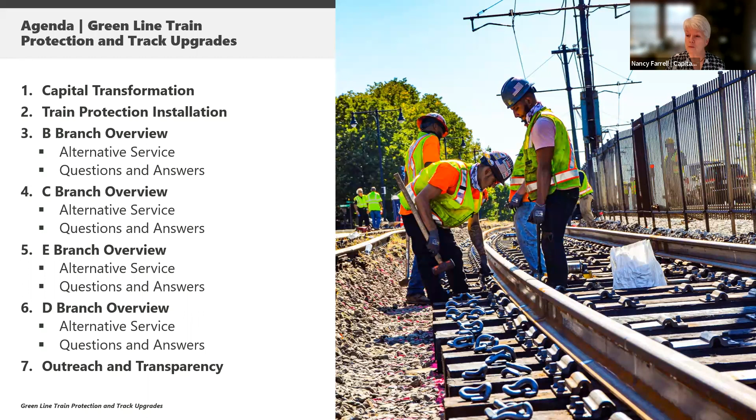Thank you, Nancy. Well, on behalf of the MBTA, thank you for joining us today. I'm here with Desiree Patrice, Andres Ashuri, Gwen Dunleavy, Ben Weinstein, and Curly Champion from the Green Line Transformation staff, but also have other project design team members with us as well.

Also joining us is Tom Yarley from Masco, and I have other MBTA departments here to support us in this presentation, including Heather Hume and Eric Burkman.

So the Capital Transformation mission is to improve the quality of service for MBTA riders and communities that we serve, through a strategic capital investments approach. But before we get started, allow me to take a couple minutes to highlight how we prioritize this portfolio of investments that's supposed to help improve the quality of service.

Building off the success of the Green Line Transformation, the MBTA formed a Capital Transformation Unit this past November, to bring a similar approach with discipline, planning, and execution, not only for the Green Line, but also to the Orange and Red Lines. We take this holistic approach to every project we undertake to improve the quality of service.

To do this, we have categorized each investment based upon its primary purpose, including improving safety, state of good repair, enhancing accessibility, upgrading trains, increasing capacity, improving the rider experience, and expanding service. Across the Capital Transformation team, we are committed to transparent and honest communication with all riders as we drive this progress across the three lines.

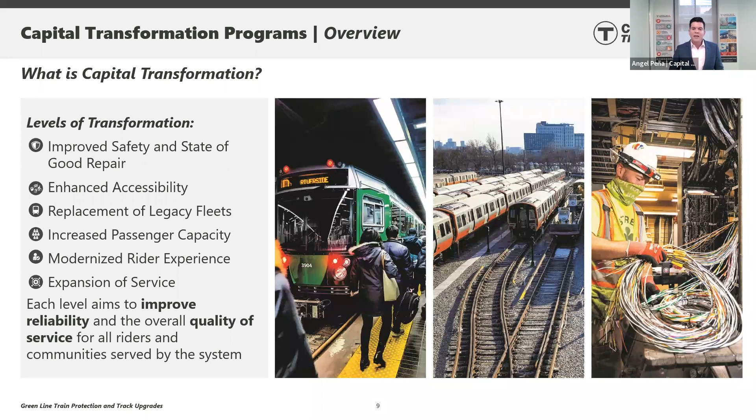But today we're here to speak about the Green Line Transformation Program. I would like to take a moment to tell you some of the exciting things we have been able to do over the last 3 years or so.

Throughout the pandemic, we accelerated work while enforcing strict guidelines to promote the health and well-being of our staff, construction crews, and the community. We also coordinated with stakeholders across the Commonwealth and communities to implement several full access closures, with one main thing in mind: to minimize disruptions and deliver these improvements much sooner.

Over the last years, we have successfully utilized this accelerated approach for many of our investments on the Green Line. To recap: throughout 9 full access closures, which we also call surges, we were able to replace more than 11 miles of track and 30 units of special track work. What that means to you is a smoother and safer ride.

We also upgraded 10 crosswalks and 36 intersections along the surface branches. This brings so much benefit to the communities and people of the Commonwealth, because these features are unique to the Green Line, which crosses roadways and interacts with motorists, pedestrians, and cyclists.

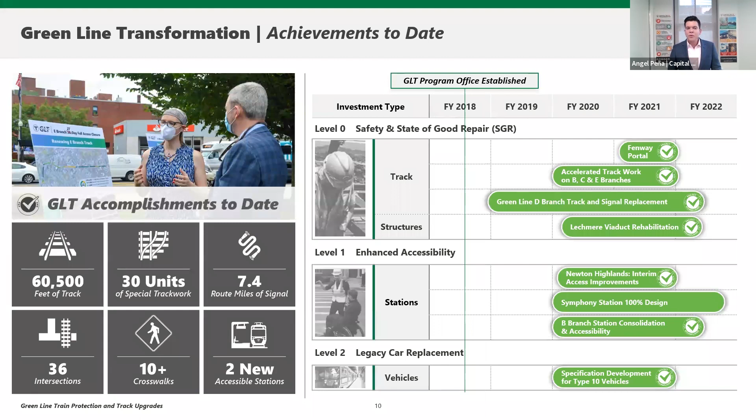I want to take a moment to bring up ongoing initiatives that other departments are bringing to the Green Line, such as the transit signal priority for the surface branches. Eric, do you mind giving us an update on these efforts?

Sure, thanks, and thanks for having me. This is really exciting and important work, of course. One of the things we started a few years ago was updating our...

One of the things we started a few years ago was updating our traffic signals throughout the region to respond to the presence of a transit vehicle. That includes the Green Line when it's on the surface going through mixed traffic intersections. This is relatively new technology, and it can increase speed along the line, decrease travel time, decrease dwell time, and improve safety at intersections.

One typical approach is as the vehicle approaches, it communicates its location to our operations center, and the traffic signal automatically adjusts by extending the green light so the train can make it through. We're excited about additional advancements expected over the coming year or so, including better measurement of how the system is working and expanding to include not only the Green Line but also bus.

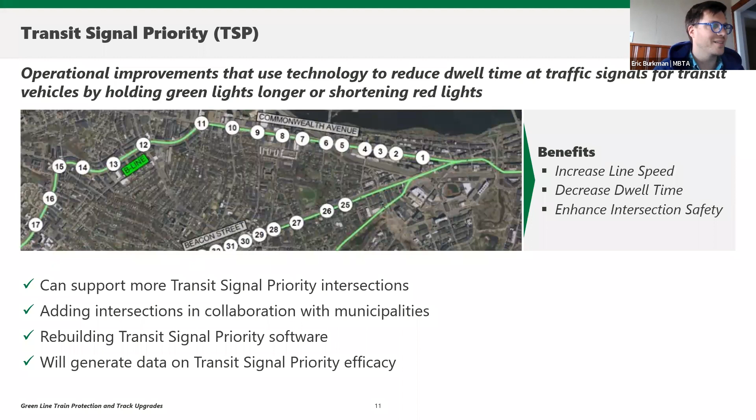Thank you, Eric. So moving on, the periods of accelerated work can be painful and disruptive for you, but they also allow us to return a safer, more reliable system back to service faster. By using full access closures, we're able to have construction crews work more efficiently.

Let me give you an example. By having a 12-day surge, we can complete the same amount of work as 6 months of weekend closures or night work. So we always seek opportunities to amplify the work during any closure, to maximize what we're doing. This enables us to have multiple projects gain access at the same time, so we disrupt you less later on.

Using this approach, the team will install the Green Line Train Protection equipment, which I'll give you more updates on later. That's the intent of the full access closures this summer on the Green Line. We'll also be upgrading 2.5 miles of track, 10 crossings, and 6 units of special track work used for switching and crossovers.

Like in any construction project, we know unexpected things can happen. But we'll always do what is best for you, the riders, and your safety. My team and I are committed to keeping you informed and providing updates on this progress throughout the construction season.

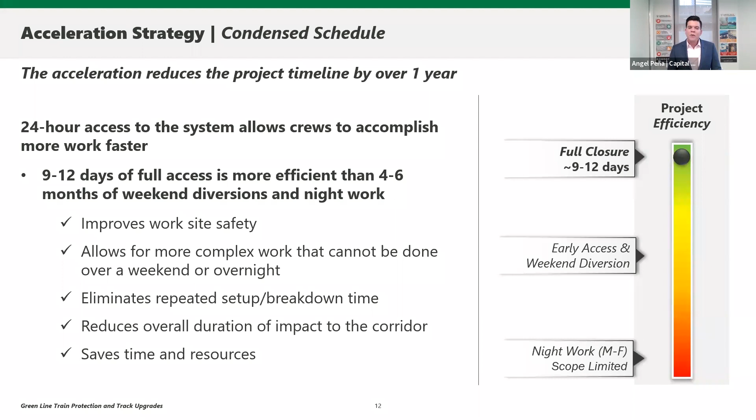Let's talk more about what the GLTPS, or Green Line Train Protection System, is about and how it works. The GLTPS will bring increased safety and reliability for the entire Green Line by improving safety through a system of vehicle and ground-based equipment to prevent train-on-train collisions. It also adds red light signal protection and incorporates speed enforcement. This is something we're fully committed to bringing to the system.

This project has four overlapping phases. Phase 1 is equipment design and validation, integrating new components into the legacy system. Phase 2 is vehicle installation, installing the new equipment into Green Line vehicles. Phase 3 is wayside installation, where we install upgraded signal equipment on the right-of-way. Phase 4 is operational integration, where the MBTA prepares to use the new safety system.

These phases overlap to accelerate their progress and mitigate service disruption for all riders. We will utilize the full access closures this summer to accelerate the installation of the ground-based equipment in order to enable us to implement the system by December 2023.

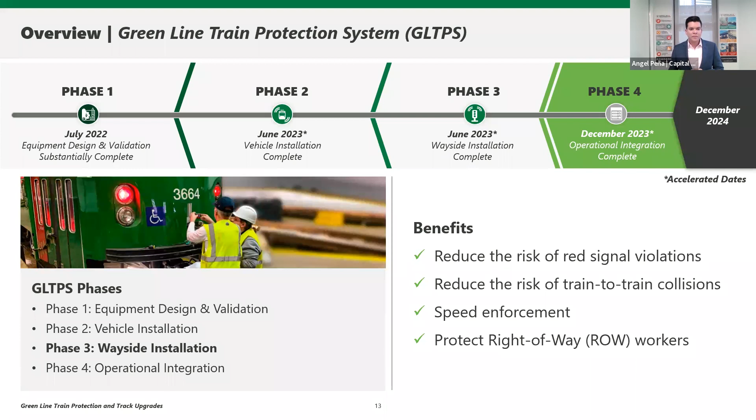So let's take a quick look at this brief video, providing an overview of how the system operates.

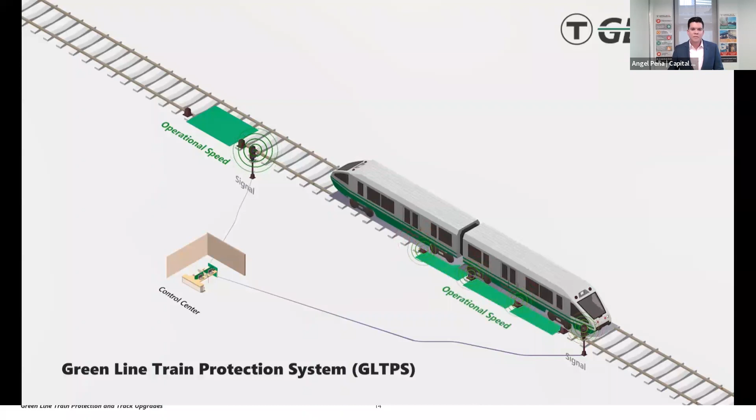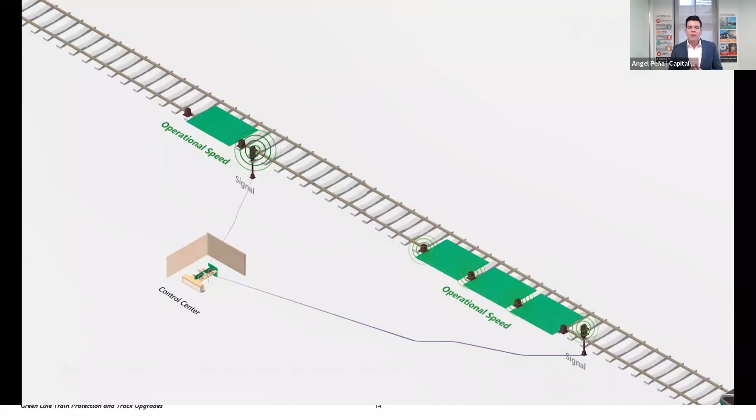So with that, I think that gives you an idea of how this works, but I'm going to allow Desiree now to review the plan of the construction work for this year.

There will be a total of 6 full access closures across the Greenline for the GLTPS wayside equipment installation. GLTPS uses different types of balises, or transmitters, installed for communication between the vehicle and the wayside equipment. There are 2 types of balises: the speed balises indicate a change in the allowable speed, while the signal balises guarantee a train stops with sufficient distance before reaching a dangerous point.

Junction boxes collect the data from wayside equipment and transmit it to the equipment installed on the train. The upgraded signal heads will specify the allowable speed a train should travel at.

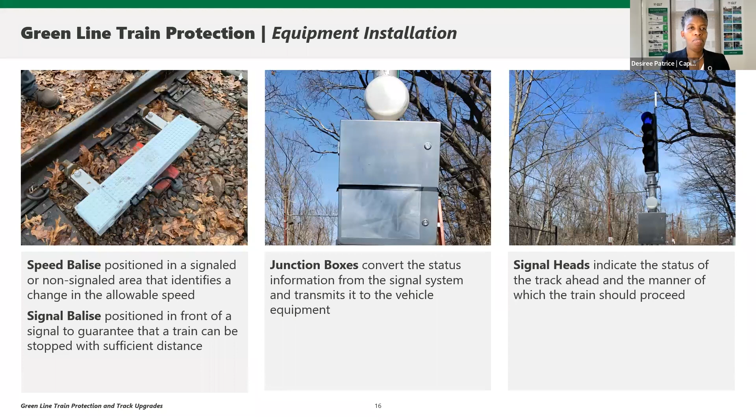Along the B, C, and E branches, the speed balises affixed to the track, wayside junction boxes, and signal balises will be installed. In the D branch, and the E branch along with the upgrades to the signal.

As Angel mentioned earlier, we will use these 6 full access closures to upgrade another 12,000 feet of track, 10 crossings, and 6 units of special track work. By replacing the track and crossing while simultaneously installing GLTPS equipment, we are optimizing the opportunity to complete 2 critical safety and reliability improvements during each full access closure this year.

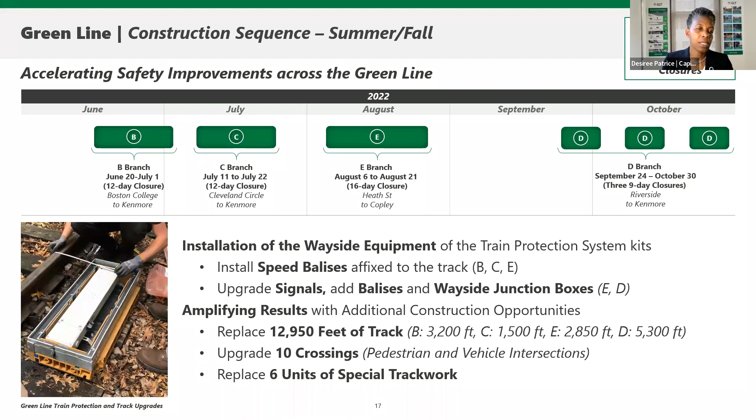Throughout the construction, there will be increased noise levels, different traffic patterns, reduced parking spaces, and impacts to pedestrians and bikers. These are some of the inconveniences that construction brings, but they are necessary to enable the improvements.

For concerns related to levels of noise, there's a 24-hour noise hotline that has already been set up for members of the community to use. The number for this hotline is shown on this slide and will be available online on the GLTPS project site.

As safety is our top priority here at Capital Transformation, crosswalks within work zones will be closed. However, signage will direct pedestrians to alternate accessible pedestrian crossings.

Capital Transformation staff will also monitor work sites, bus services, and traffic so we can proactively address challenges as they arise.

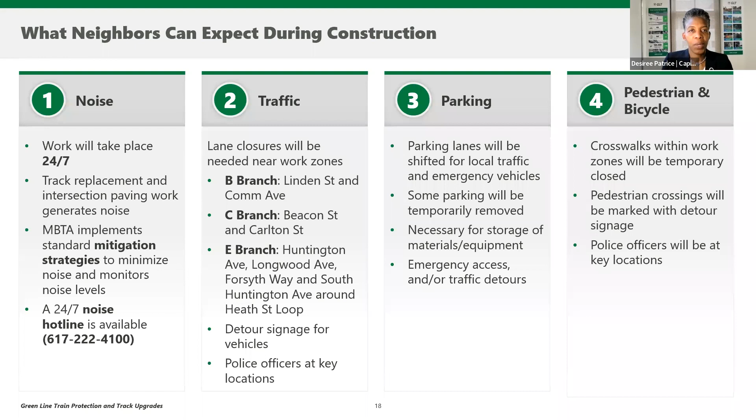As construction progresses, there will be many different crews executing the work. Construction activities will look familiar and others will look different. There will be times when activities on the track will seem calm because the installation of GLTPS equipment will utilize smaller and mobile crews. Overall, the work is a little bit quieter. However, you should still expect some noise associated with pavement cutting and patching.

During track construction activities, you will see similar activities from the past 2 years: larger construction crews and equipment doing track upgrades. This work is far more visible and disruptive.

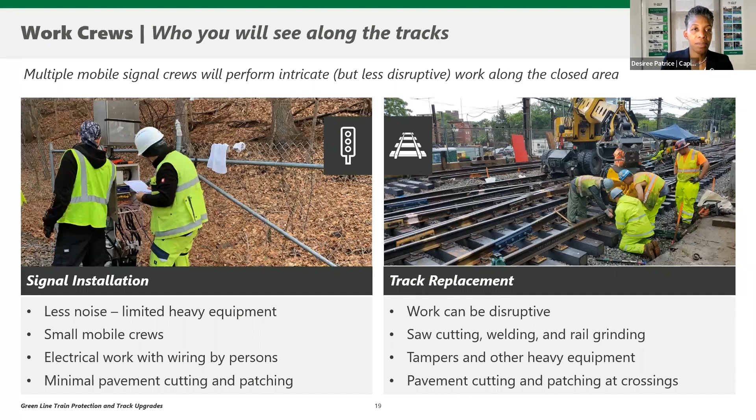So, Andres, can you tell us a little bit more in depth about when this work will start? Sure. The B branch will be our first Green Line surge of the year.

We will be closing the B branch beginning Monday, June 20th until Friday, July 1st. During this 12-day surge, regular service will be paused from Boston College to Kenmore to allow for track and safety upgrades. Accessible shuttle buses will run from the start to end of service each day to accommodate the B branch passengers.

As part of the GLTPS equipment installation, speed balises, or transmitters that indicate a change in the allowable speed, like Desiree mentioned before, will be attached to the track.

In addition, over 3,000 feet of track will be replaced between Linden Street intersection and Packard's Corner platform. We will also replace units of special track and upgrade one intersection at Linden Street and one pedestrian crossing at Fordham Road.

Taking a look at the general timeline for this work, prep work will begin on Monday, June 6th and wrap up on Friday, June 10th, with crews doing pre-welding and staging material. I want to mention that this prep work will not cause any impact on regular service.

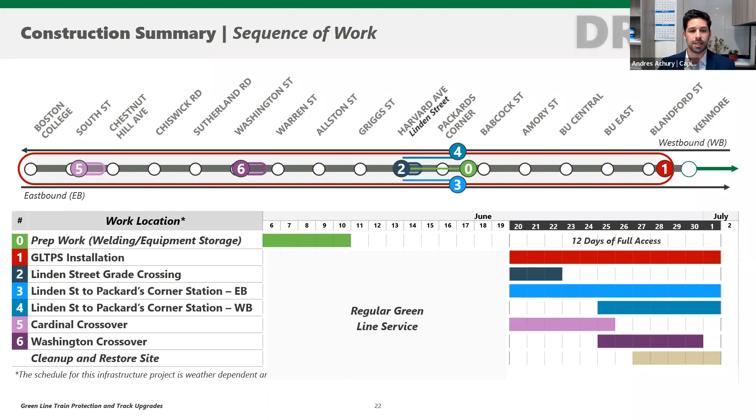Now we want to walk you through some specifics of the impacts on different areas. The track replacement from Packards Corner to Linden Street requires westbound lane closure from Brighton Ave to Harvard Ave, but will not impact the eastbound lanes. We are also taking some parking on the westbound side of the Collector Road. While doing this work, the Linden Street crossing will remain closed.

Pedestrian access will be supported with proper signage to direct people safely across Commonwealth Ave. The only pedestrian crosswalk that will be closed in this area is the Fordham Road crosswalk. The Packard Station crosswalk will remain open, but may require short-term closures at certain times. We will update the public when and if the crosswalk needs to be closed.

The main section of Commonwealth Ave will remain open for traffic in both directions. We will work with local MBTA and local departments to be present at active construction zones for the safety of all pedestrians and construction crews.

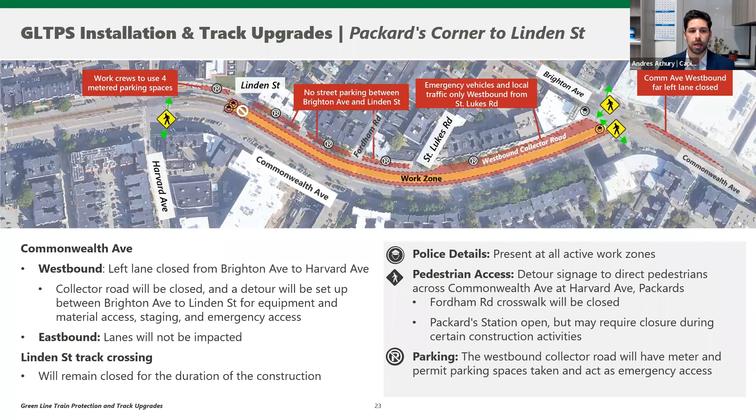For the 5 days needed to replace the crossover near Boston College, we will keep one lane open for travel in each direction.

Similar to the construction from Packards Corner to Harvard Ave, the westbound left lane will be closed between Lake Street and Greycliff Road for construction installing the special track work at the Cardinal Street crossover. On the eastbound side, we'll take both travel lanes and divert eastbound traffic through the parking lane for about 600 feet between Lake Street and Greycliff Road to make sure there is enough room for cars to get across the section.

With this construction, we do not have any planned impacts to pedestrian access or vehicle crossings. However, there will be no resident parking between Lake Street and Greycliff Road on Commonwealth Ave heading eastbound. In addition to the traffic management devices, MBTA Transit Police and Boston College Police details will be present at active work zones.

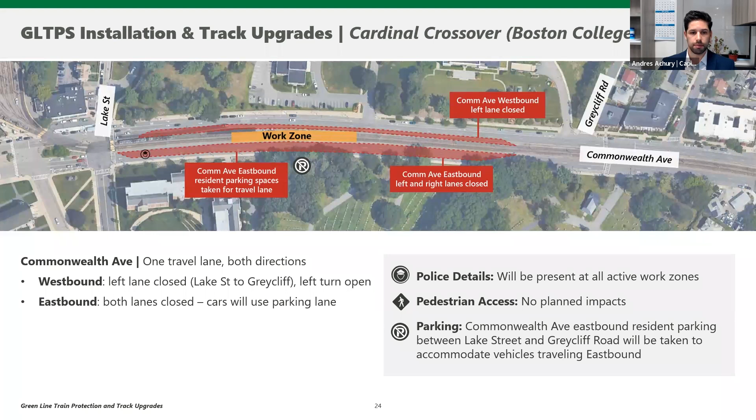Similarly, for the Washington Street crossover upgrade, we need to take the left lane in both directions along Commonwealth Ave to support construction. These lane closures will be in place for the full duration of the closure.

For short-term durations, the contractor will need to unload heavy railroad material, taking both lanes in a given direction and pushing traffic onto the Collector Road. No parking will be taken at this location. Like the Cardinal crossover, police details will be present, and we will actively monitor crosswalks at Washington.

Now, Curly, can you walk us through the alternative service that is going to be available for the B-Branch riders?

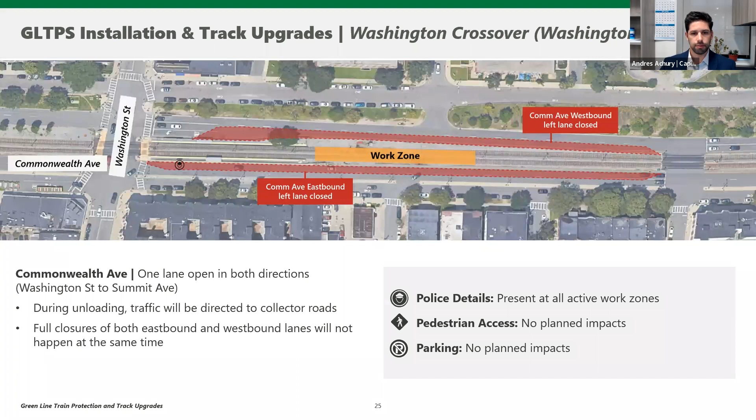Absolutely. Just get my camera going.

In terms of alternative service on the B-Branch, we are committed to providing riders with free and accessible shuttle bus service that will run from Boston College to Kenmore. These shuttles will meet and at times exceed the frequency of our current B-Branch schedule. During peak service, riders can expect a shuttle frequency of 3 to 7 minutes, and 5 to 8 minutes during off-peak.

I do want to mention that although the shuttles are not MBTA buses, they will be low-floored vehicles, providing ease of access for all riders.

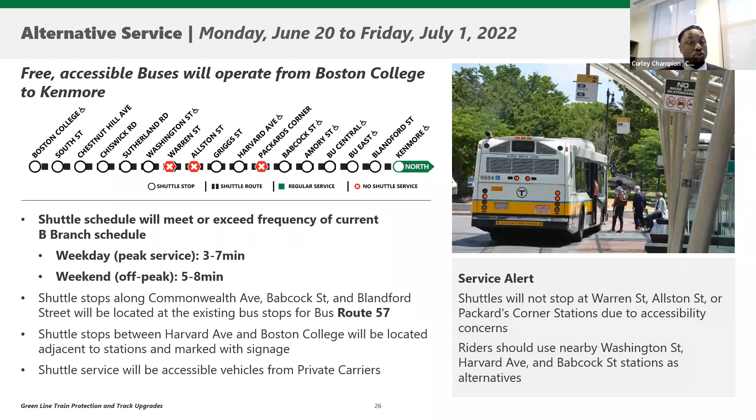Stops along Commonwealth Avenue from Babcock Street to Blandford Street will be located at fully accessible Route 57 bus stops, located just adjacent to station platforms. For rider convenience, we've also planned additional clearly marked and accessible bus stops to be added along Commonwealth Avenue. It's worth noting that parking will not be removed to accommodate any additional bus stops.

Due to unsafe and inaccessible sidewalk conditions, shuttle buses will not stop at Packard's Corner, Allston Street, and Warren Street. These stop locations were fully evaluated by the system-wide accessibility team, who determined that the stops were inaccessible. Therefore, for your own safety, riders will be redirected to nearby Washington Street, Griggs Street, Harvard Ave, and Babcock Street stations to board buses at designated bus stops, all within an approximate 3 to 5 minute walk from the unserved location.

If this alternative is unfeasible, eligible riders can utilize The RIDE to get to their destinations. Please contact the Ride Eligibility Center at 617-337-2727 or email trec@paratransit.org.

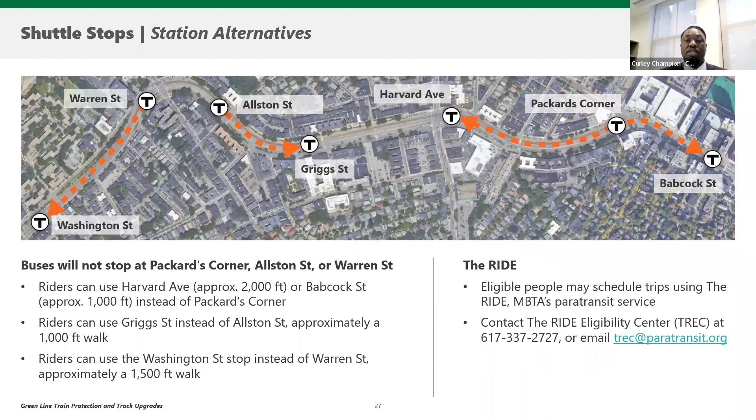As a reminder for all who are able, there are several Blue Bike stations conveniently located close to stations along the B branch. We will now answer any questions from the community who live along the B branch.

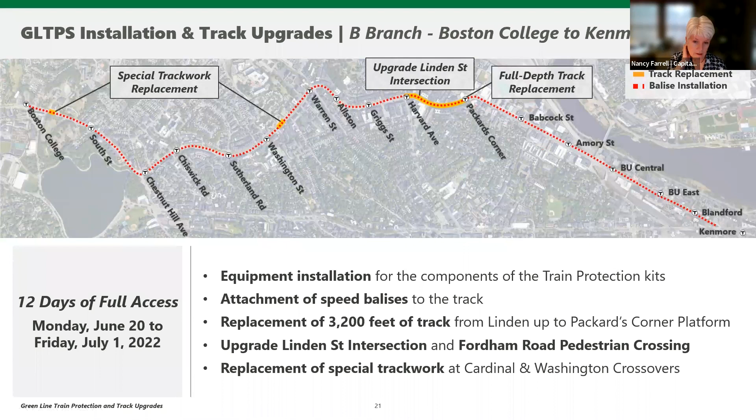There's another question. How does this fit into the larger reconstruction of Commonwealth Avenue, particularly bike lanes and improved accessibility? That is more of a long-term question and might be something that perhaps Desiree or Andres could address.

Yes, Nancy, and you are correct, this is somewhat of a long-term response. However, in the meantime, since this will be an initiative taken by a number of different stakeholders, we will not hold off on installing GLTPS on the current line while we continue to address it and come to the public later on with a plan for input into what the future of the Green Line in that area will look like. When it comes to the bike lanes, this is a city initiative, and we are working hand in hand with them to make sure it becomes a full city and full use community street. Thanks, Desiree.

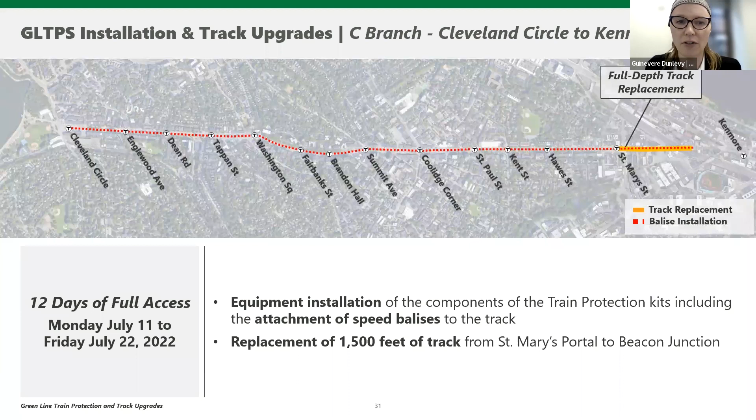As a general schedule for the C branch, prep work will begin on Tuesday, July 5th, and last for 4 days. During this prep work, there will be no disruptions to regularly scheduled service. GLTPS equipment installation along with track replacement will begin on Monday, July 11th and continue through the entire closure. Crews will end the closure by cleaning up and restoring the work site.

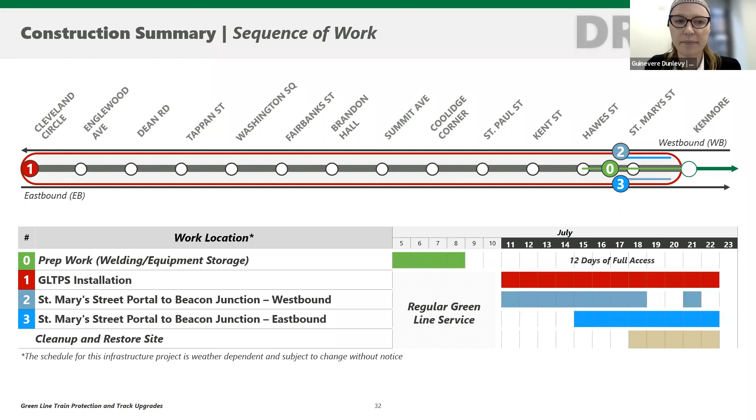For the safety of pedestrians and motorists, there will be lane closures from Hawes Street to St. Mary's. The eastbound and westbound left lanes will be closed in this area while track work is underway in the tunnel. However, left lane closures will be temporarily removed during rush hour in the direction of peak traffic from Monday to Friday. The Carlton Street track crossing, as well as crosswalks throughout the work zone, will be closed for the duration of construction. Pedestrian detour signage will be set up to direct pedestrians to cross Beacon Street at Hawes Street or at Park Drive. The median parking areas between St. Mary Station and Hawes Street will be used for construction vehicles and track reconstruction activities.

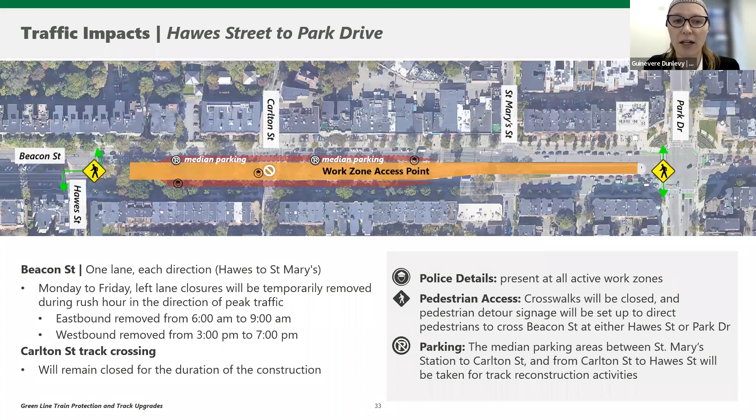Curley, can you share what alternative service is going to be available to C branch riders? Absolutely. Utilizing low-floored private carriers, our shuttle schedule will again meet and at times exceed the frequency of our current C branch schedule. During peak service, riders can expect a shuttle frequency headway of about 5 to 6 minutes, and 5 to 8 minutes during off-peak.

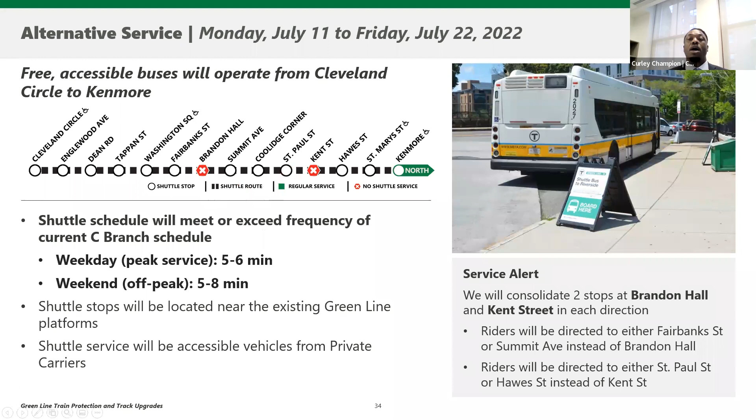Shuttle stops will be located near existing C branch platforms. However, I would like to highlight that we will be consolidating 2 stops, Brandon Hall and Kent Street, in both directions. So instead of boarding buses at Brandon Hall, riders will be directed to either Fairbanks Street or Summit Avenue, and to either St. Paul Street or Hawes Street instead of Kent Street. There will be proper signage located along the route to notify passengers where they can board the shuttle.

It's important to note that minimizing the number of stops improves overall shuttle bus efficiency. This is connected to the consolidation of stops and allows riders to reach their destination in the most reliable manner possible. Some would see it as an inconvenience, but it is a practice to minimize the number of stops and the stopping and going. As previously mentioned, for those who are eligible, The RIDE may be used to schedule trips as needed.

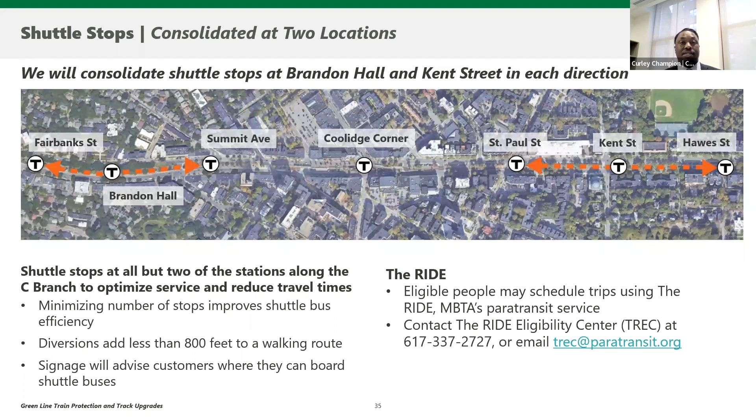As a second reminder, similar to the B branch, Blue Bikes are available along the C branch. Many Blue Bike stations are located close to station platforms. Now I'll turn it back over to Nancy to give you all the opportunity to ask further questions.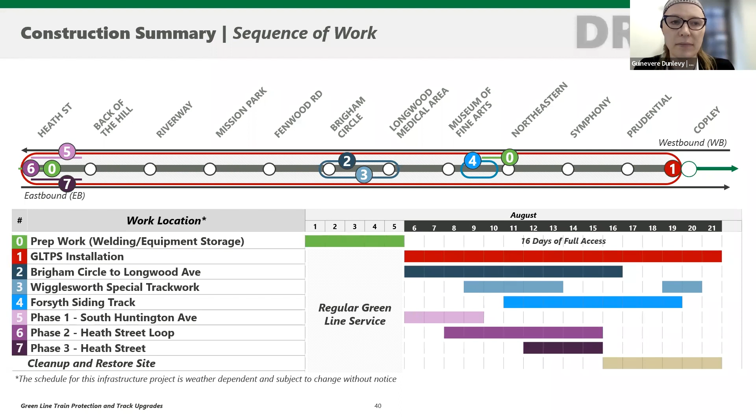While track is being replaced, there will be some minimal traffic diversions. Left lanes will be closed between Tremont Street and the Mass Art Museum, with one travel lane in each direction remaining open along Huntington Ave.

The Wigglesworth crossover will be reconstructed at the same time as the tracks between Brigham Circle and Longwood Avenue. The Longwood Avenue crossing of Huntington Ave will remain closed for the duration of the construction to facilitate the completion of all this work. I'll speak more about this in a moment.

Police details will be active in all work zones, and all pedestrian crossings within the work zone will be closed. Signage guiding traffic and pedestrians will be on display for all those who find themselves along this section of the E branch.

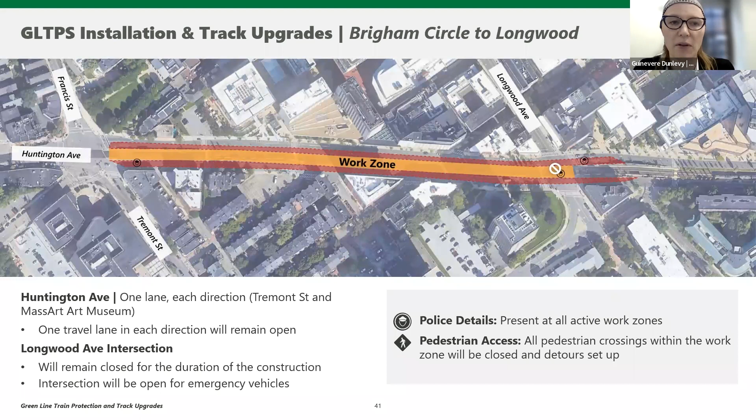As I previously stated, the Longwood Avenue crossing of Huntington Ave will remain closed for the duration of the surge to all but emergency vehicles. Drivers needing to cross Huntington Ave will be able to make U-turns at the intersection of Francis and Tremont Street, and at the Evans Way crossing.

Pedestrians will be able to cross at Brigham Circle and Evans Way. Now it's my pleasure to turn it over to Tom Yardley with Masco, who will be working with his team on the beautification of Huntington Ave during this time.

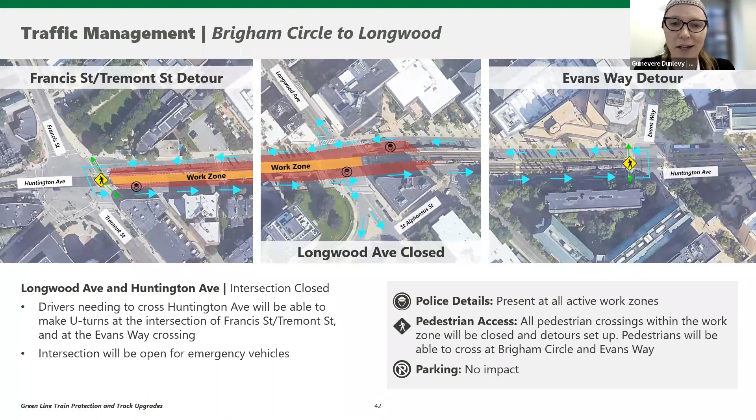I think everyone can hear me here. So...

We were very happy to collaborate with the Green Line Transformation team. This map shows locations where we are replacing dead trees. Masco has been responsible for just over a decade for a total of 225 trees on Huntington Avenue. By working with the team here, we were able to coordinate the needed replacement of these trees with the work happening this August. We're thrilled to be able to do that, and I'm looking forward to that partnership, which has been very successful for us, working adjacent our very busy district.

I don't have any more comments on this particular slide, but if anyone wants to ask me any questions after this about the work we do, I'd be happy to answer that, and I'll pass it back to Gwen. Thank you, Tom. Moving along the line.

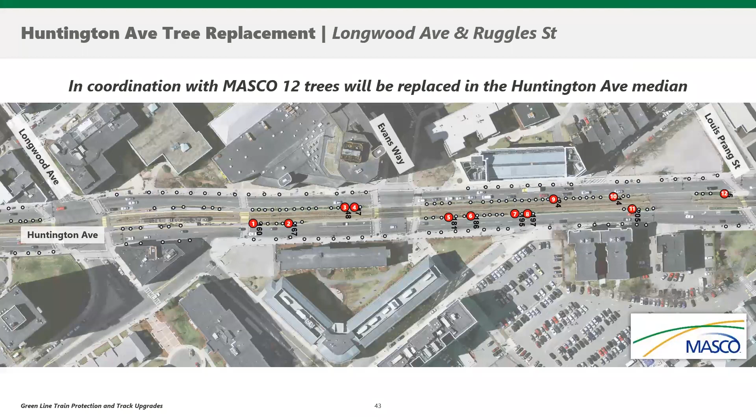Okay, well, thank you for your question, and thank you for your answer, Tom. So the next area we're going to discuss is going to be the area near Forsyth Way.

The Forsyth Way grade crossing and the left lanes in both directions of Huntington Ave will be closed between Museum Road and Forsyth Street. Additionally, the metered parking spaces and the southbound lane of Forsyth Way will be closed from August 1st through the end of the surge, 24 hours a day.

Traffic will temporarily shift on Forsyth Way to allow a single lane in each direction. All pedestrian crossings located within the track work zone shall be closed, with signage clearly directing passage of pedestrians to open crossings.

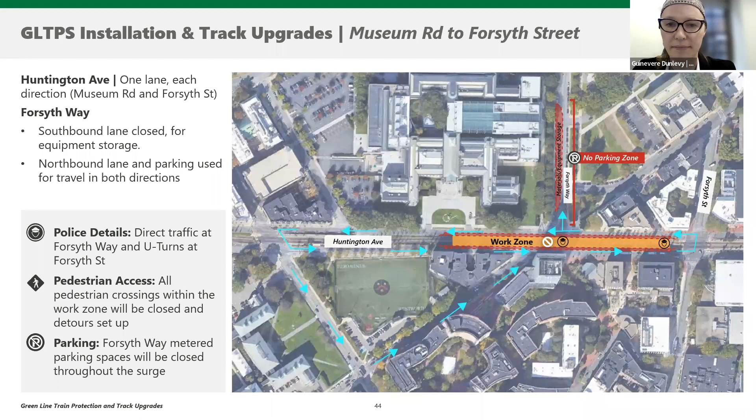Lastly, we can talk about the Heath Street on the E Branch. During the upgrades of the Heath Street loop, construction will be broken into 3 phases to limit traffic impacts. Construction will start along South Huntington Ave and progress towards Heath Street.

Phase 1 lane closures will commence the first weekend of the surge, starting August 6th through August 9th. During this period, there will be 1 travel lane on South Huntington Ave open for alternating bi-directional traffic, with construction crews and police details managing the flow of traffic.

Phase 2 reconstruction will not require any lane closures. However, there will be a lane shift on Heath Street. Phase 2 will take place from August 9th to August 11th.

During the second week of the surge, from August 11th to the 15th, Phase 3 lane closures will be set up. During this period, Heath Street will be limited to 1 lane of alternating bidirectional traffic with contractors and police details there to direct the flow. At no time will both South Huntington and Heath Street lane closures be implemented at the same time.

In addition to the traffic management devices, MBTA Transit Police, City of Boston, and construction crew laborers will be present at all active work zones to help direct pedestrians and vehicles. All pedestrian crossings located within the work zone shall be closed, and signage directing pedestrians will be set up for the entire duration of the work.

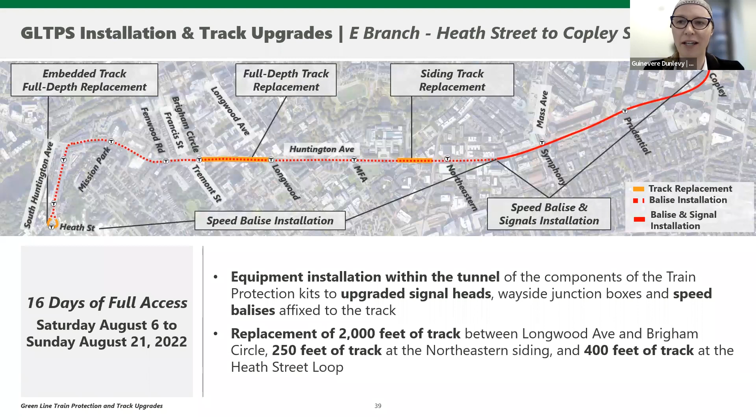Here's a question: you talk about doing GLTPS installation in the Huntington Avenue tunnel, but not in the rest of the tunnel. Will there be closures of the main tunnel in the future for this work? We are still planning the specifics of future closures, but yes, GLTPS will be installed throughout the entirety of the Green Line, not only on the surface branches, but in the tunnel and in the new GLX areas.

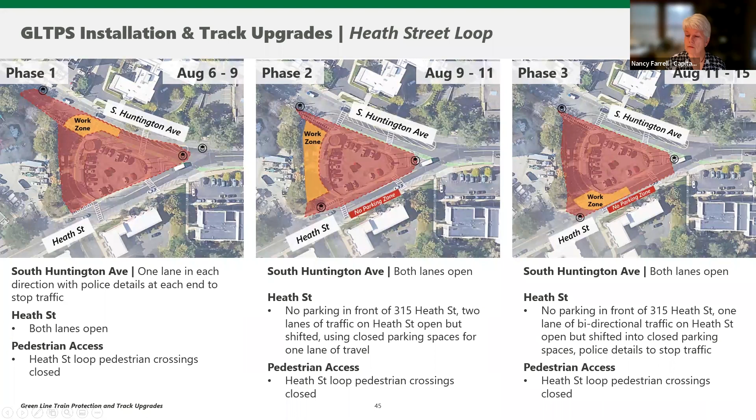I really do want to mention our support for the E Branch work in general, notwithstanding people's good individual technical comments. As you all know, MASCO, whom I represent, is a nonprofit organization, and we represent all the medical, academic and cultural institutions in Longwood. Quickly, to cut to the chase, this overall transformation project is actually critical to the city as a whole, not just our district. Future phases are going to double the capacity on the D and E lines with the purchase of larger Type 10 cars, and this is all very much setting the table for that work.

I just can't emphasize how critical it is to us. It's going to provide relief from peak hour crowding, increase capacity, reliability, safety, and it's improving crossing and safety in the streets as well. The tracks that were replaced last year around Brigham Circle now sit in the street bed much more comfortably. There are very few gaps. It's much safer to cross. These are very important improvements.

So the ability to make these surges and do this work so efficiently is absolutely critical to the functioning of one of the region's major medical districts. I really do want to offer our extremely strong support for this work. The coordination has been very good as well. So we look forward to continuing this. I really just wanted to make sure we were on record to express our support for the project and to help explain how critical it is to our particular district and needs.

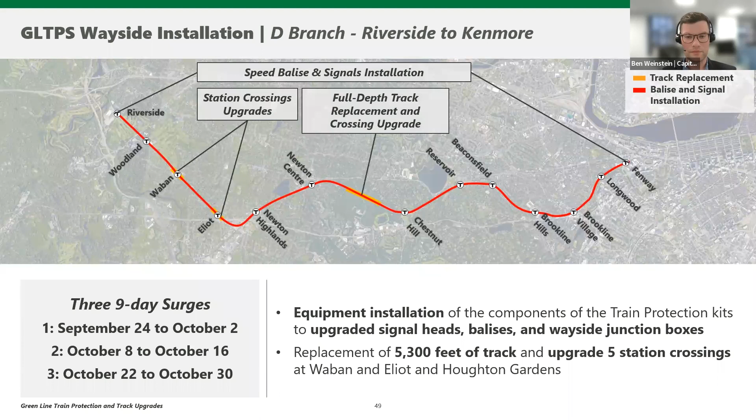Prep work will begin Monday, September 19th and last for 5 days. During this time, there will be no disruptions to service for D Branch riders. Once prep work is complete, the first 9-day surge will begin.

The first surge will include GLTPS wayside equipment installation and full depth track and crossing reconstruction at Waban Station. After 5 days of regularly scheduled service, the second closure will begin for continued GLTPS installation and track and crossing reconstruction at Eliot Station. Following another 5 days of regularly scheduled service, the last surge, beginning Saturday, October 22nd, is where crews will continue and complete wayside installation and reconstruct the track and crossing at Houghton Gardens.

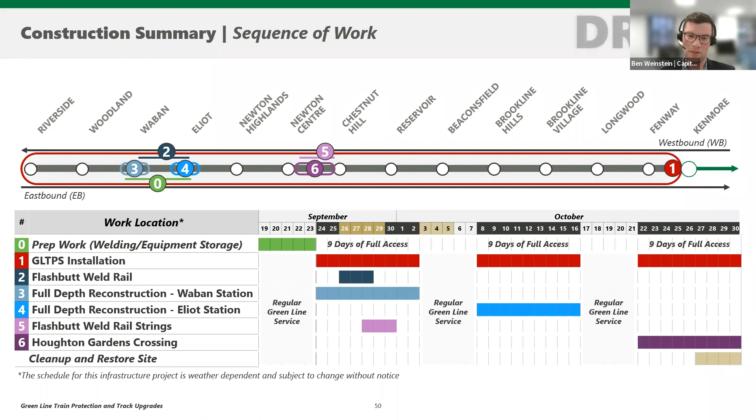As track reconstruction occurs at Waban Station, Eliot Station, and Houghton Gardens, we will also be upgrading each pedestrian crossing and reconstructing truck pads with rubber panels. This construction creates a smoother ride for D Branch passengers and increases safety for pedestrians walking throughout the area and those boarding or getting off the train.

This will also set up our team for our D Branch 4 stations accessibility upgrades at Beaconsfield, Chestnut Hill, Eliot, and Waban stations. This project will make the D Branch the first fully accessible branch of the Green Line. Stay tuned for a public meeting focused on that project later this summer, with construction starting in 2023.

Although these improvements are necessary for D Branch riders, our closures will impact regularly scheduled service. Curley, can you let us know what D Branch riders can expect?

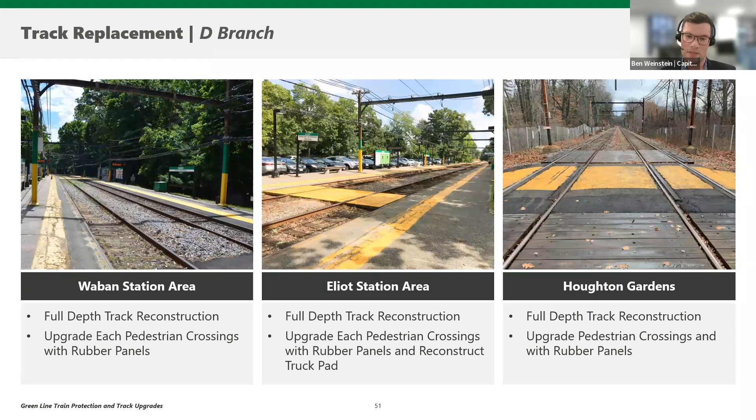Sure can. D Branch riders can expect private carrier shuttle buses to replace Green Line service from Riverside to Kenmore during each full access closure, with a 6 to 7 minute peak service headway and a 7 to 8 minute headway for off-peak. I'd like to highlight that shuttle buses will not be able to service Beaconsfield due to narrow roads in the area. Riders can board our shuttle buses at Reservoir Station, a 9-minute walk, or travel to Dean Road, a 2-minute walk, for C Branch connections. Please note that we will be monitoring bus demand and capacity throughout the surge to ensure there are enough buses to handle the safe travel of all riders.

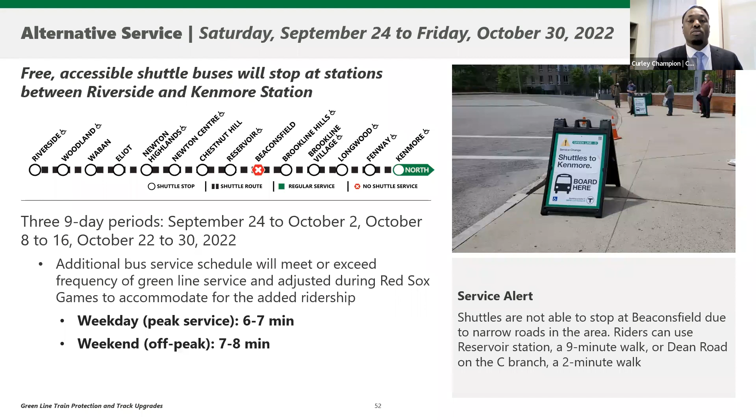To accommodate riders attending games or events at Fenway Park during the closures, there will be an express shuttle from Riverside to Copley. The express shuttle will depart from Riverside Station and take the Massachusetts Turnpike, I-90, to Copley Square.

This gives riders the option for a quick, direct route to Copley Square.

So for community engagement, there is going to be a lot of work going on in the Green Line, and it's our job to keep riders informed regarding all the service changes across the system. Construction can sometimes be unpredictable, and changes in field conditions as we uncover certain things in the construction zone can lead to unexpected outcomes. However, we assure you that we will keep you informed if any plans change, and we provide regular updates. It is our commitment to do the best for our riders and their safety, and we will always try to notify way early as soon as these issues come up.

The MBTA is committed to avoiding unplanned disruptions while we implement these crucial investments to improve safety and reliability. You can expect us to offer clear signage to customers, and service representatives will be on site to help riders locate the nearest bus stops while the Green Line is out of service. Construction activities may cause uncertainty regarding how to get around, but we assure you that adequate signage is displayed, clearly marked where to board the replacement and alternate service. More importantly, we are committed to providing timely updates on our website and public communication channels so the community has the most up-to-date information on traffic patterns and bus stop location changes throughout. For motorists, we will set up changeable message signs 48 hours before construction starts, to help motorists seek alternate routes while the Green Line is under construction.

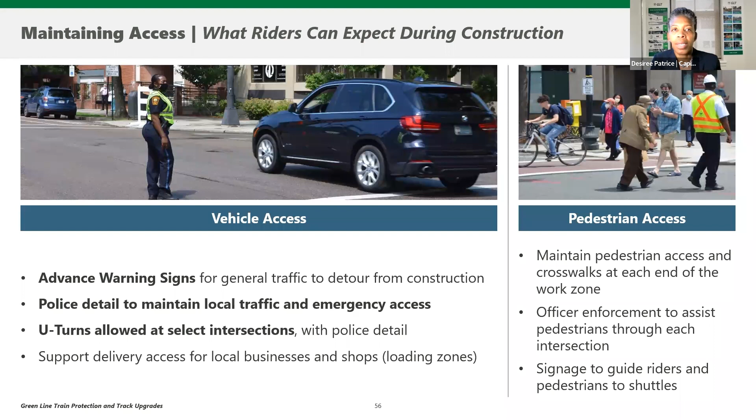So, as we said earlier, there will be noise, but we are implementing strategies to mitigate its severity. So, Angel?

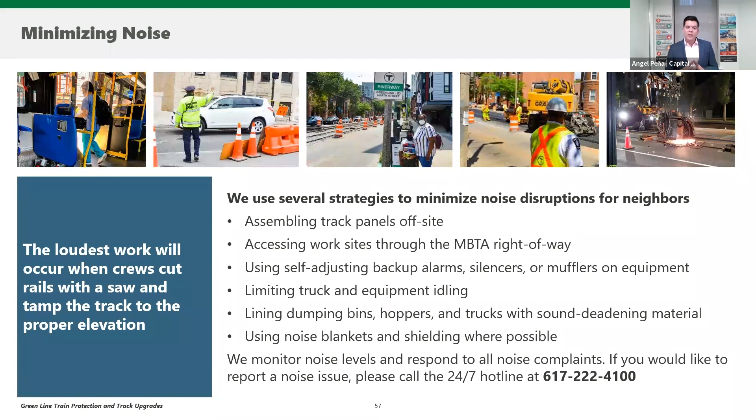We've been very active in getting the word out this summer for the planned construction on the Green Line. You probably got a press release back on April 29th announcing the work and giving further notice about what this was going to be, and inviting you to this meeting today. We also distributed flyers in 4 different languages encouraging participation for tonight's event, and we committed, like we've done in the past, to supporting local businesses by distributing signage for them to display indicating that they're open while we're in construction.

We also will continue responding to emails you send to our GLT inbox at glt@mbta.com. But most importantly, we are committed to always, like Desiree said, communicate way in advance and give you weekly updates on how this work is progressing. So stay in tune, we're very committed.

I am very committed as we progress the work on each of these branches that you're quite aware how that's coming along. I want to personally thank all the community groups and organizations, thank you for being here tonight and giving us comments. We will always take that and do the best we can, because it also shows that the commitment to the transformation of this Green Line doesn't reside only on us, it resides on you as well. So I look forward to continued collaboration through this summer as we bring all this construction schedule. And remember what we're doing here - I know it's painful, but we're trying to bring much benefit for safety for everyone, much faster than it could have been otherwise for everybody on the Green Line.